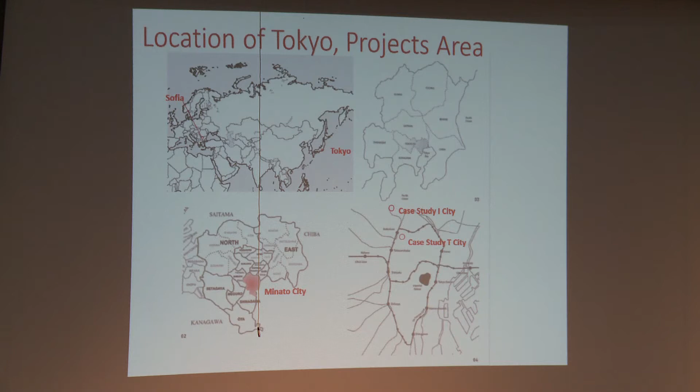The Tokyo Prefecture government divided the city into about 5,177 neighborhoods, roughly 5,000, and rated them 1 to 5 based on the risk of building collapse and fire caused by an earthquake.

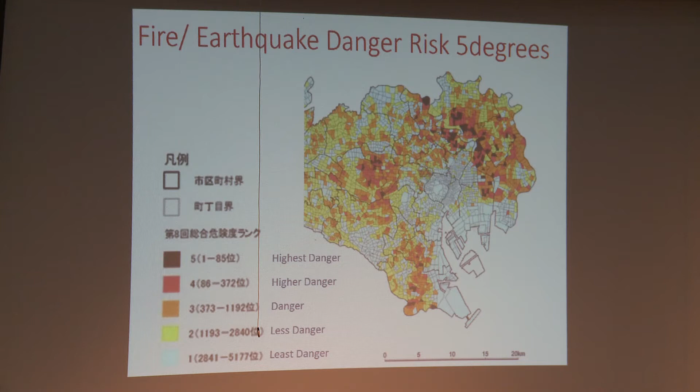But those neighborhoods have positive aspects, such as a high sense of community, and they are convenient places to live physically and economically. I have been making efforts to improve such areas, requested by the Tokyo Prefecture government and local city governments. This is a project of micro infrastructure and micro housing.

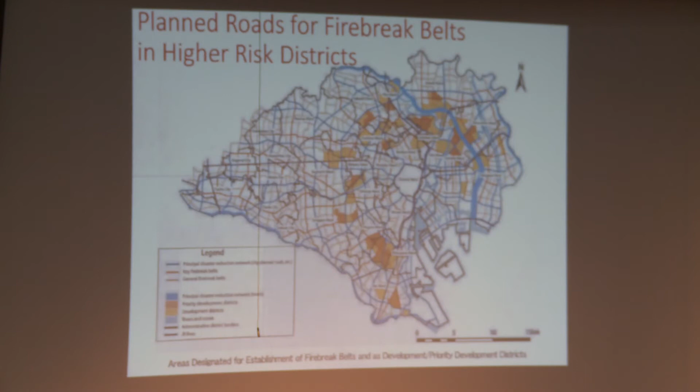The Tokyo Prefecture government has been trying to improve disaster resistance. It designated 28 districts, as you see here, covering an area of 7,000 hectares as development districts.

Among those districts, the Tokyo government further designated priority development districts—11 districts covering 2,400 hectares—that urgently require development to enhance disaster resistance.

This shows the strategy to improve the development districts. The Tokyo Prefecture government and local city governments designate the development district and planned streets through city planning. The Tokyo government constructs these city-planned streets to form fire break belts, while also encouraging community people to build fireproof houses and stay rather than move out.

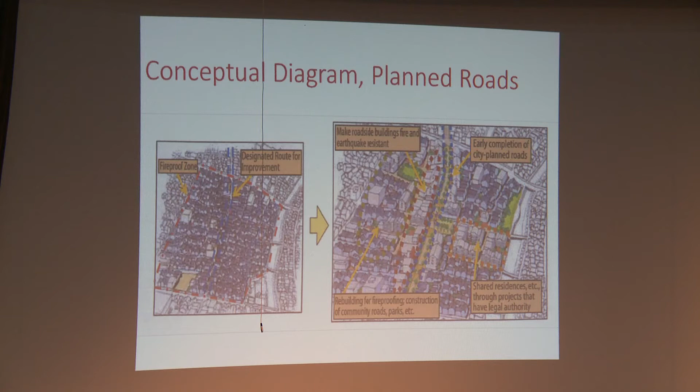This shows more details. Old narrow streets like this will be widened to 6 meters so a fire engine can enter. Small parks and green spaces will be provided. These are the micro infrastructure. On the remaining land, smaller in size than before, smaller fireproof houses will be built—this is micro housing.

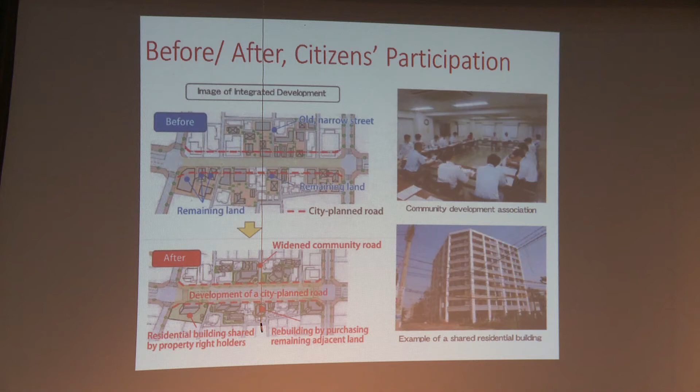This shows a case study of a micro infrastructure improvement project by my team. 80% of the neighborhood people feel it's a high risk area, but they enjoy a rich sense of community life. The average site area is between 40 and 50 square meters, as you can see from the size of the houses and sites.

All are wooden, single detached houses, 2 stories high. The upper picture shows before, and the lower picture shows after the project. The road width before was 2 meters, so in case of a fire, the fire engine was not able to enter.

The newly built houses have a fireproof structure, 3 stories high. My team met 100 landowners and house owners to persuade them to cooperate with micro infrastructure improvements to widen the street to 6 meters. The goals are to construct minimum infrastructure—a 6-meter wide road and a small park—this is micro infrastructure, and to rebuild fireproof houses, which is micro housing.

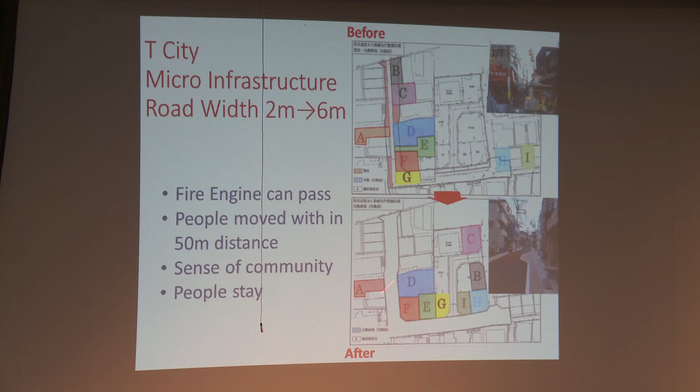This shows the present situation of micro-infrastructure, before and after. The previous road width was 2 meters, as you can see. After widening, the road width expanded to 6 meters.

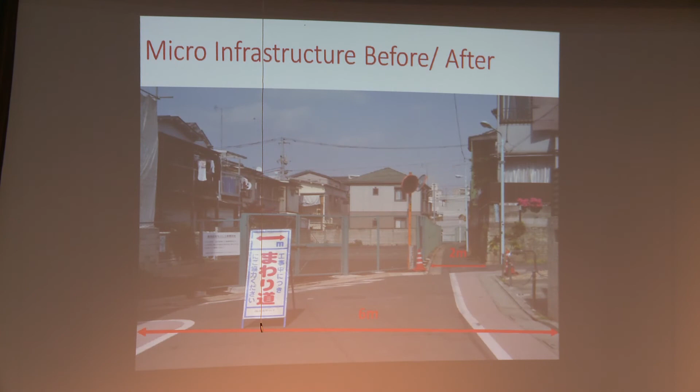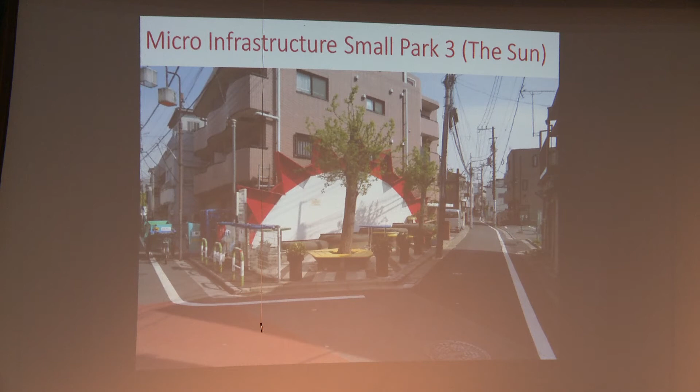This shows the third example of micro-infrastructure of a small park. It symbolizes the sun. The street on the right side here will be widened soon to 6 meters by my team. Houses will be rebuilt to fireproof structure, and the height will stay the same.

This shows a fourth example of micro-infrastructure of a small park. The theme is an umbrella, where people gather under the umbrella.

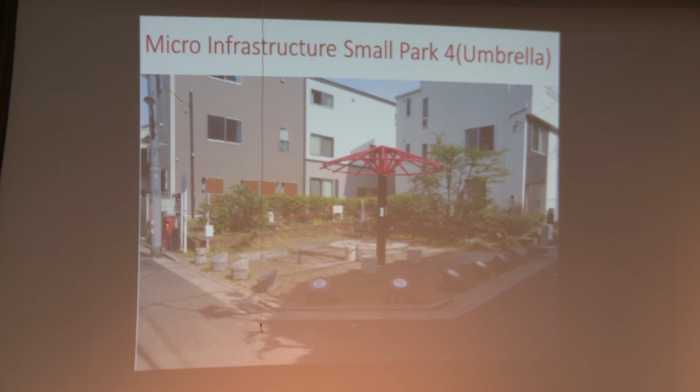This shows a micro-infrastructure project underway. The street width will be widened to 6 meters. The dark brown shows the existing part, which is only 2 or 3 meters width. The yellow part shows the projected widening. The street shape was determined to avoid house demolition as much as possible. Houses will be built to fireproof structure, and people will stay or move within 50 meters so that the sense of community will be kept.

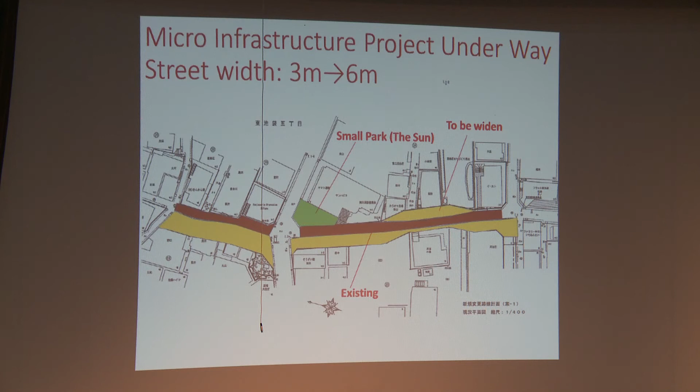This shows another project in another city. The previous road width was only 2 meters here, or maybe 1 meter in this spot. The micro-infrastructure improvement widened the street up to 4 meters. The right side is before, the left side is after, widened to 4 meters.

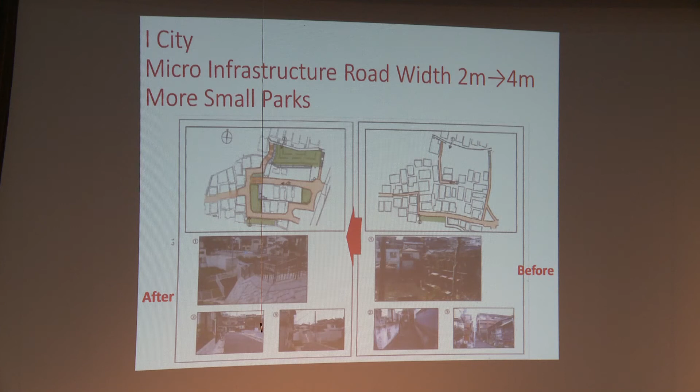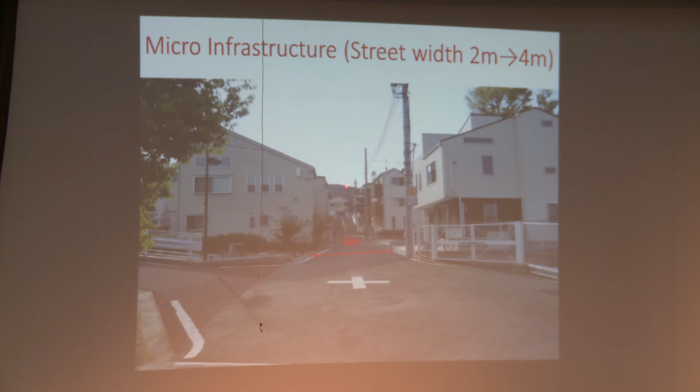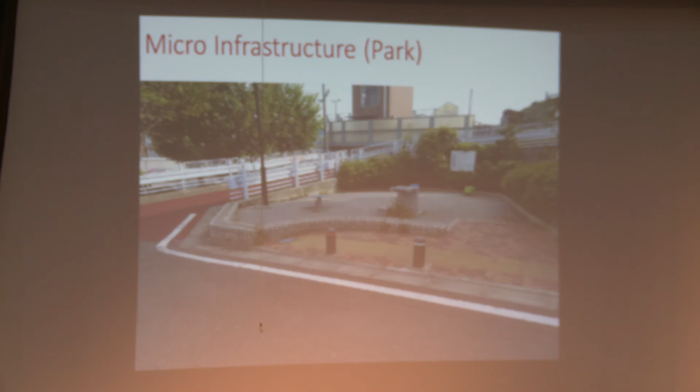This shows the situation after the improvement. The road width became 4 meters. Here's another angle of the picture. In the same neighborhood, this is micro-infrastructure of a small park.

I would like to show some case studies of micro-housing. This is an actual example of micro-housing my team did. The width of the house is 6 meters. I proposed to reform a 35 year old house, giving it another 35 years of life.

Generally speaking, the average life of a house in Tokyo is 30 years. I added insulation and double-glazed windows so the house became environmentally conscious, reducing the electric bill by half compared to before. This part...

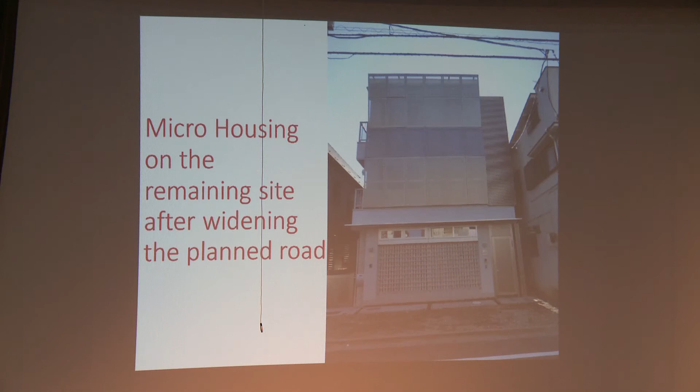...is for the widening of the street. This shows case studies of micro-housing. The site size is 10 by 10, and the height is 10 meters.

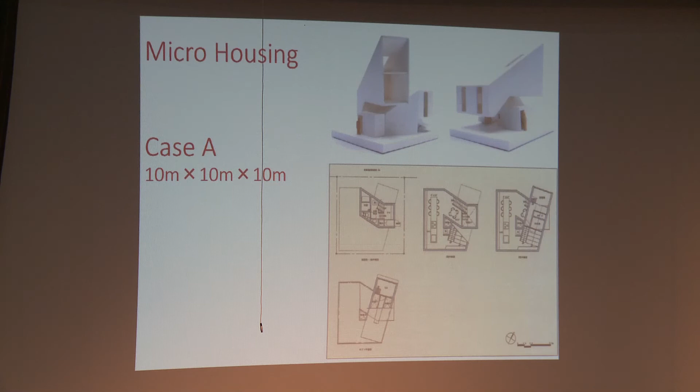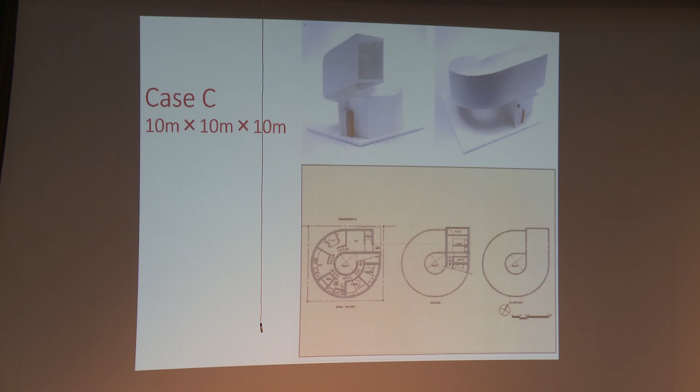Case A is zigzag. Case B is spiral, with a slope corridor. The site size is the same. Case C is curved and circular. Case D is curved facade. Case E is skip floor.

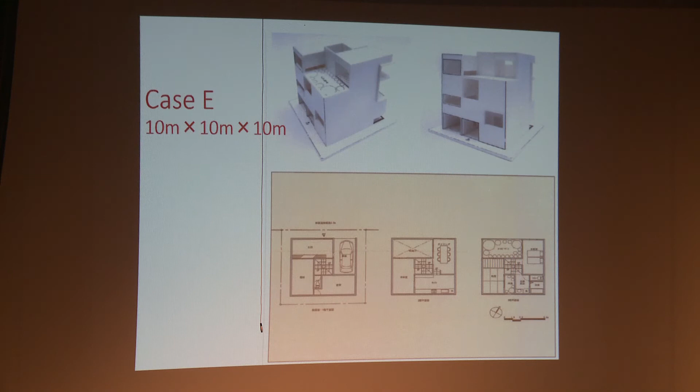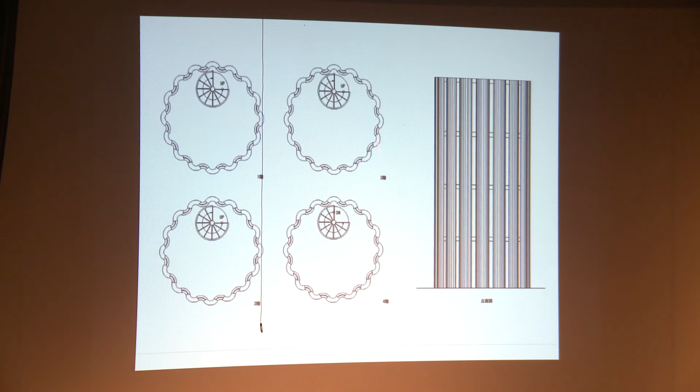Case F, the site size is 5 by 5 meters, height is 10 meters, 4-storied. It shows the floor plan.

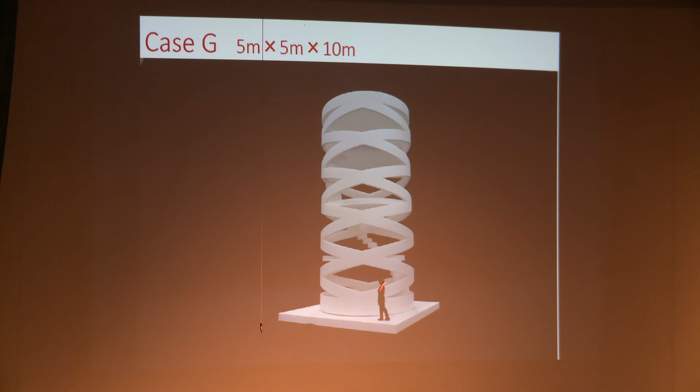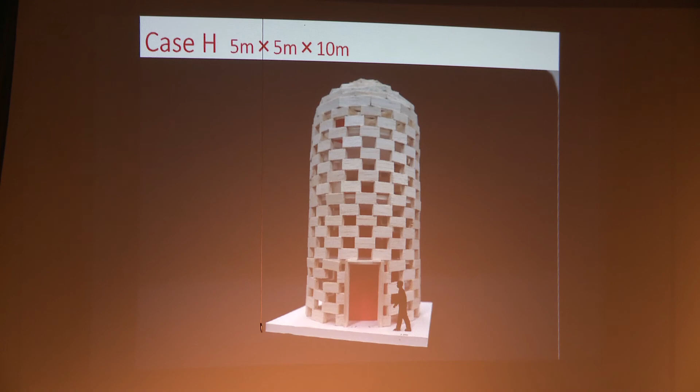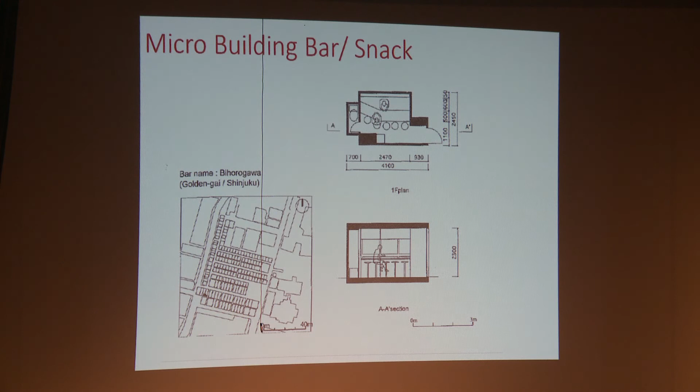In conclusion, there are many high-risk areas from the standpoint of fire risk and earthquake disaster at the foot of tall buildings in Tokyo districts. Micro-infrastructure and micro-housing are needed for those areas.

The key components are: first, create a safer district through micro-infrastructure, at least 6 meters width of road and small parks. Second, let people stay in the same district, at least within 50 meters. Third, keep the sense of community. Fourth, create a sustainable neighborhood, environmentally conscious and affordable micro-housing that is fireproof. This takes more than 10 years, and community architects play an important role in Tokyo. Thank you for your attention.